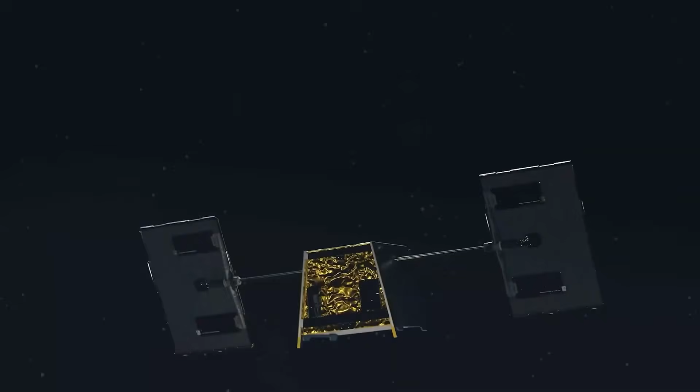Industries are the beating heart of our world. They move us, supply us, shelter us, power us, connect us. They improve our homes, our cities, our environments. And behind them all is ABB.

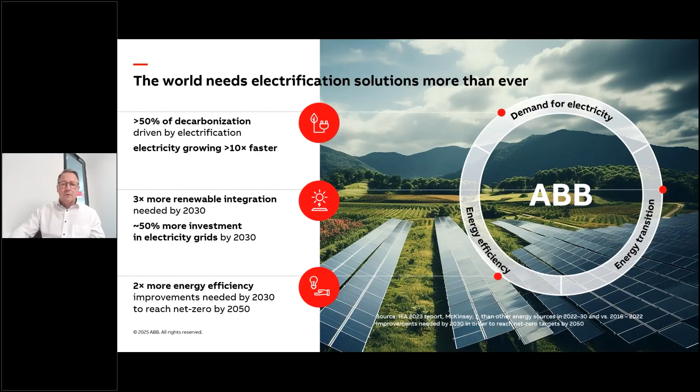We at ABB have the technology, the solutions, and the expertise to accelerate the transition to clean energy, which is necessary for a net zero carbon future. We have the ability to enable the distribution of renewable energy, also critical to the energy sector and energy transition. We keep businesses, homes, and industries running efficiently, reliably, and safely. We support our customers in optimizing and decarbonizing their operations.

Some time back, we did a short survey with our customers. Maybe one of you have even answered this survey. We clearly see that there's a demand for switchgear which is increasing, which comes back to the earlier mentioned point with renewable energy, the growth in data centers, grid modernization, as well as power generation.

Digitalizing switchgear and electrical distribution helps customers and users meet the needs of energy efficiency and continuity of service. Smart switchgear can constantly detect, analyze conditions, and maintenance needs that may occur in the network. We are able to integrate different sensor technology and software to monitor, utilize, and optimize the operating cycles used in the network.

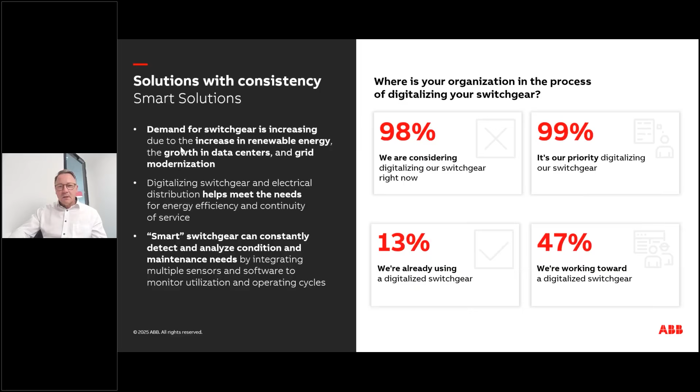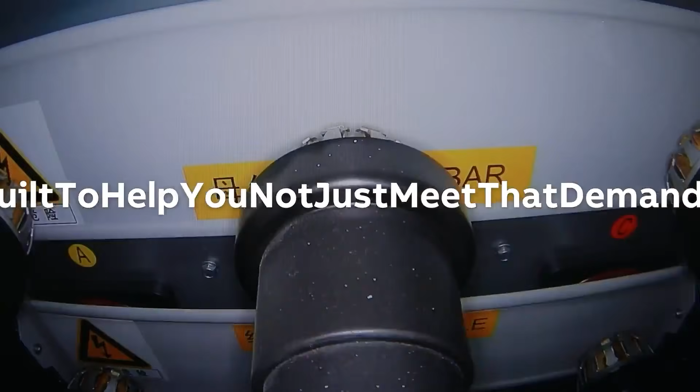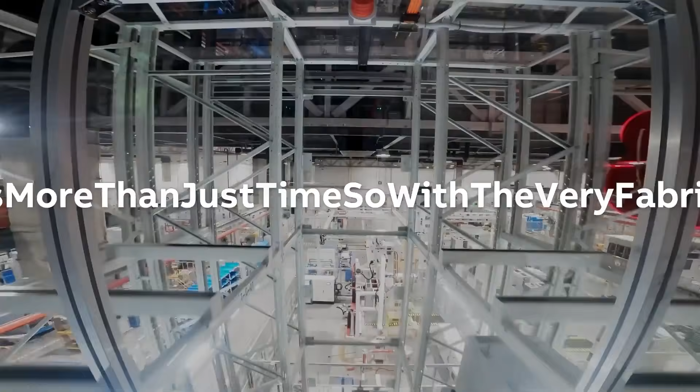Our lives are non-stop, always on, a ceaseless flow of tasks. It means the demands placed on our energy are non-stop too, and will continue to increase beyond our imagination. Greater efficiency, greater sustainability, greater reliability. It's why our infrastructure is built to help you not just meet that demand, but surpass it. We know that when energy gets interrupted, when that flow falters, it breaks more than just confidence and costs more than just time. So with the very fabric of power changing and long-term reliability non-negotiable, Unigear gives you the power to flow non-stop.

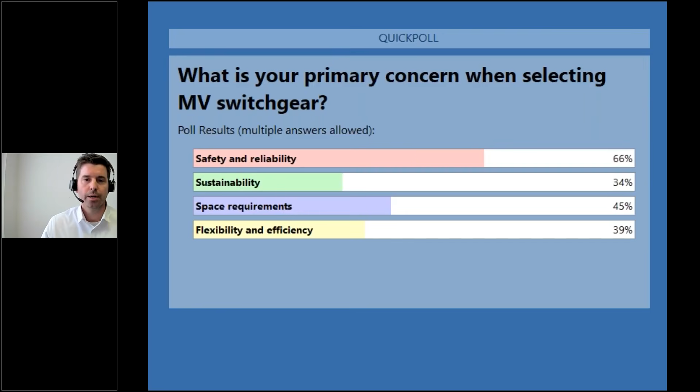Thank you very much for voting, and I would continue with my part. Basically, we will touch on the newest 500mm wide Unigear ZS1 panel.

An electrical network is the silent enabler of the energy transition, as it collects renewable energy from wind, solar, and hydro, and delivers it to all electrical loads. ABB products and solutions are the building blocks of the electrical network. Energy transition doesn't mean only adding renewable energy, but also electrifying the industrial and domestic loads. Today, the primary distribution substations are creating the backbone of this network.

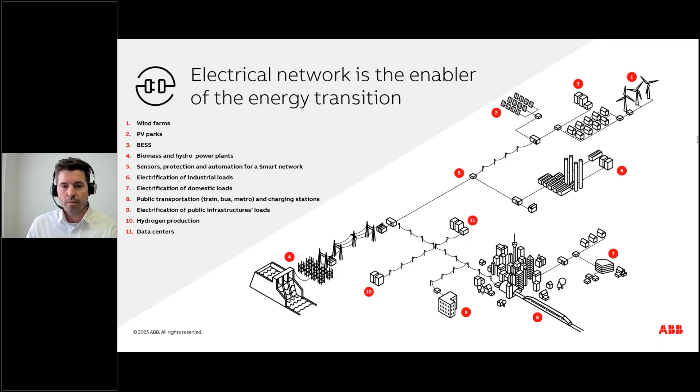Unigear is a well-established product family on the market within medium voltage air insulated switchgears. It includes multiple product lines, starting with Unigear ZS1, Unigear ZS2, Unigear MCC motor control center in single bus bar, double bus bar, or even double level arrangements. Unigear ZS1 is our main product line, and since its release in 1999, we have delivered more than 700,000 panels globally. Our footprint is available in more than 150 countries on 6 continents.

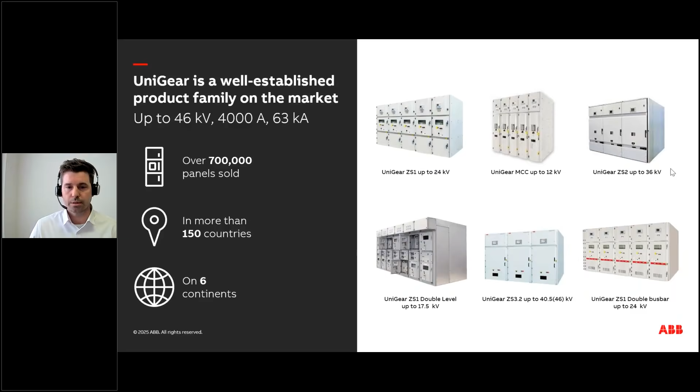As we saw in the poll, safety and reliability and available space were the mainly selected options, where we believe our newest 500mm wide Unigear ZS1 panel is the best choice to tackle these challenges. It has the narrowest footprint on the market for applications asking 12 kilovolt, 1250 amps of nominal current, and 31.5 kA of short circuit current. It is part of the Unigear ZS1 product line, thus compatibility within the Unigear family is achieved, coming with the highest safety standard. 500 mm is available now for orders with delivery starting from mid of 2025.

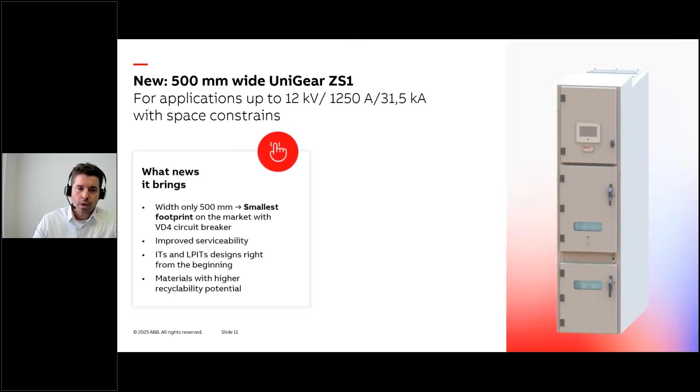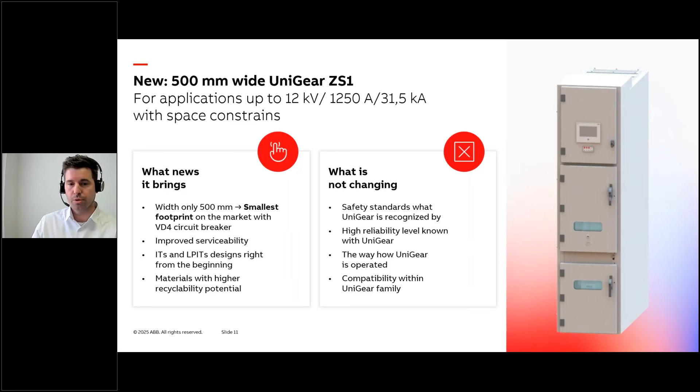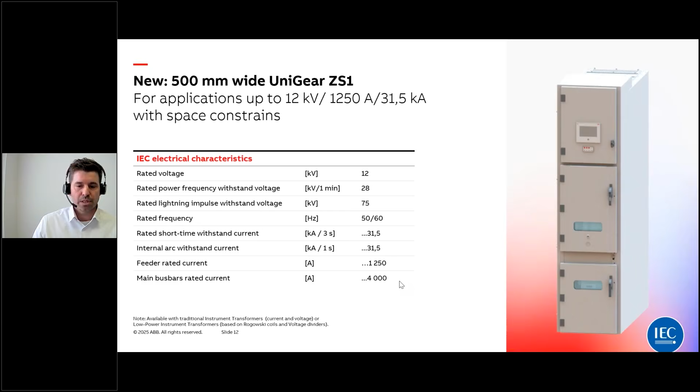So the 500 mm is suitable for applications asking 12 kilovolt of nominal voltage, 1250 amps of rated current, and 31.5 kiloamps of short circuit current. Plus, if we look at the busbar rating, it can go up to a busbar rated current of 4000 amps, so it can be used in such high applications.

When we look into the typical panels available in this 500 mm wide Unigear ZS1 panel, the designs start with simple incoming, outgoing panels, via bus ties and bus risers to be able to form multi-sectional switchgear lineups. Furthermore, it includes metering cubicles, plus direct incoming feeder, all available optionally with voltage busbar measurement.

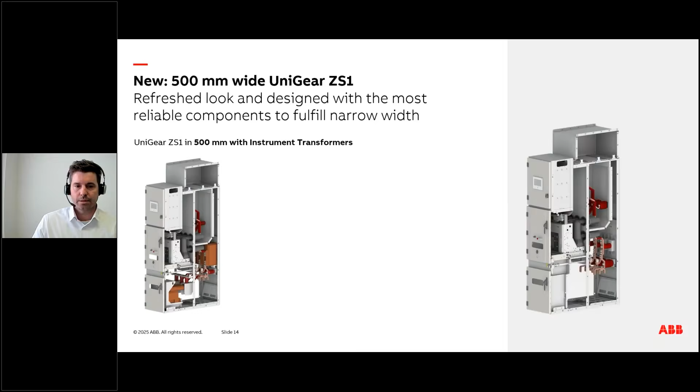Now let's look into the panel itself. The 500 mm comes with a refreshed look and is designed with the most reliable components. From the design perspective, the panel is available in two variants: first with instrument transformers, and second with low power instrument transformers. When we look into the components forming the solution, the key component is the famous circuit breaker, VD4 type, used here with embedded poles.

The second key component is the thermoplastic spouts, which help improve the recyclability level. Third is the earthing switch from our EK family, now the latest evolution of the earthing switches is the EK7 type. Then the key highlight of the panel design is the cable connection. The cable connection height is 450 millimeters, allowing us to connect up to 3 cables per phase.

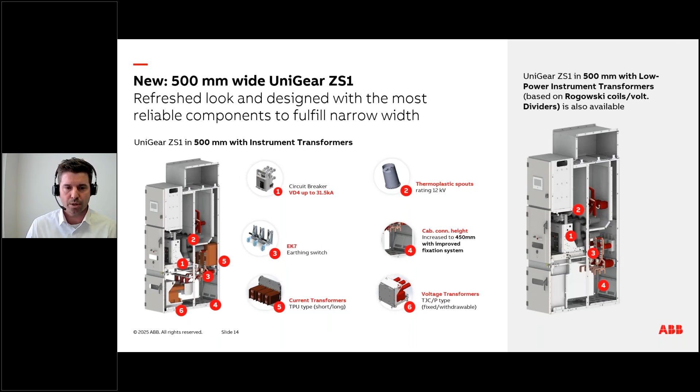When we look into the current transformers, they are typically installed in the cable compartment, and voltage transformers are installed in the front of the cable compartment part of the panel, either in the fixed or removable design. When we look into the low power instrument transformers version of the panel, or the panel accommodating medium voltage sensors, Unigear can accommodate up to 2 sets of current sensors based on the Rogowski coil principle, and up to 2 sets of voltage sensors, one of which can be installed in the busbar compartment for busbar voltage measurement, and the second in the cable compartment for cable voltage measurement.

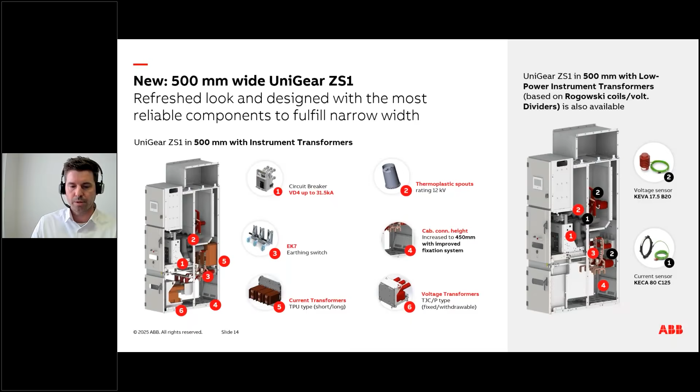When we look at the typical arrangements we can form out of this newest 500mm wide Unigear ZS1 panel, there are three examples shown on screen. Example 1 is a pure lineup where 500mm Unigear ZS1 panels are used in incoming feeders and outgoings. This is a very typical lineup asking 12 kilovolt nominal voltage, 1250 amps nominal current, and 31.5 kA short circuit current. A typical application can be light industry.

In the second example, the 500mm panel can be combined with other switchgear panels from the Unigear family portfolio and used in the outgoing feeders. These lineups can typically be used in heavy industry or even data centers.

The third lineup combines the 500mm from the Unigear ZS1 product line with other more powerful widths of this product line, where higher nominal current or higher busbar current is required. In that case, the 500mm can still fit nicely into the outgoing applications, while the incoming and busbar ratings go above 1250 amps. So all three examples have one thing in common: with the 500mm used in the lineups, we can save up more space.

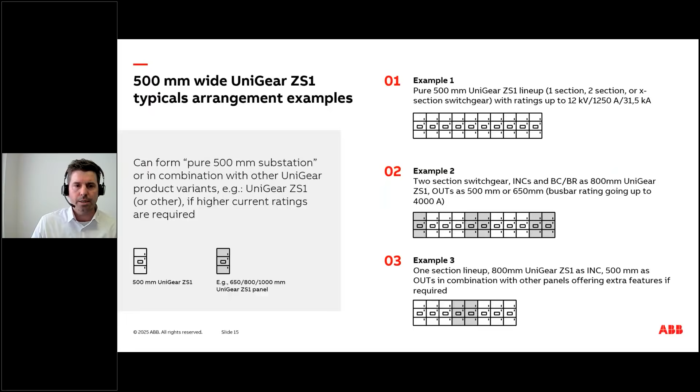In the substations. But if we come back to the 500mm, I feel that this is a product variant which could help give the right answer to the challenges you just selected. In summary, the 500mm delivers space saving in the switchgear room.

That is thanks to the narrow width, and it comes with the famous VD4 circuit breaker. The weight reduction and energy loss reduction come thanks to the usage of low power instrument transformers. That's why in this panel variant we have, since the beginning, released both options: either with instrument transformers or with low power instrument transformers. The reduction of CO2 comes hand in hand thanks to the low power instrument transformer version, using current sensors and voltage sensors instead of traditional instrument transformers, which is much more energy efficient.

Thanks to the narrow width, basically more panels can fit into the switchgear room. We've also put a lot of effort into serviceability, to guarantee serviceability even when the panel is facing the wall in the back. And as mentioned earlier, the panel is now available for ordering, with delivery starting from mid of 2025.

As usual, can I go one slide back? Yes. The first thing you need to do when you want to improve is to start measuring. The best way in terms of sustainability to measure this is to run a complete life cycle assessment.

The life cycle assessment of the product covers its entire life. As you can see on the slide, we can divide it into two basic phases. The first one is from cradle to gate, where we focus more on the product and its production itself.

Starting from the purchasing of raw material, not only to understand and evaluate what material we are using, but also to understand where we are purchasing it, and to map and understand the transportation of the material. Then when we have the material in a factory, we have to handle it.

In our operations, we have to bend, cut metal sheets, copper bars, and then assemble them together. This is one part. The second important part is the energy profile of the factory where we are producing the product.

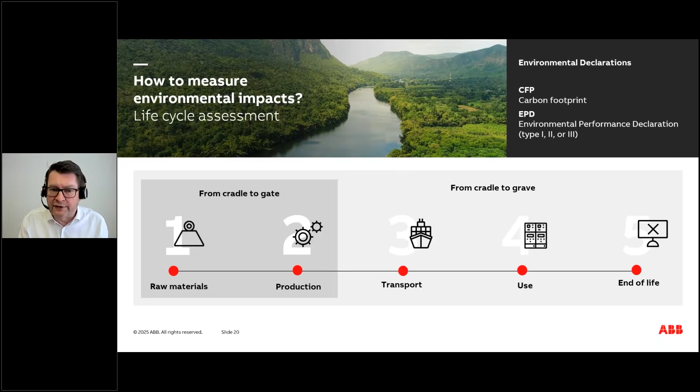And then the last one is also the end of life. I would say when we complete the life cycle assessment of the product, we then have to deliver to you, the customer, some reasonable and readable document called the Environmental Product Declaration.

Generally we can divide environmental declarations into three types. The first one is Type 2, according to ISO 14021 - self-declared environmental claims. In this case, the manufacturer prepares the internal calculation and data, and documents it themselves, which can have certain benefits and also drawbacks.

The second one is Type 3, according to ISO 14025, which is internally verified. The difference from the first one is that in Type 3, internally verified, the manufacturer has trained their own auditors and verifiers who are able to go through and verify it. I would say both these types can have a faster process to reach you, and potentially lower cost.

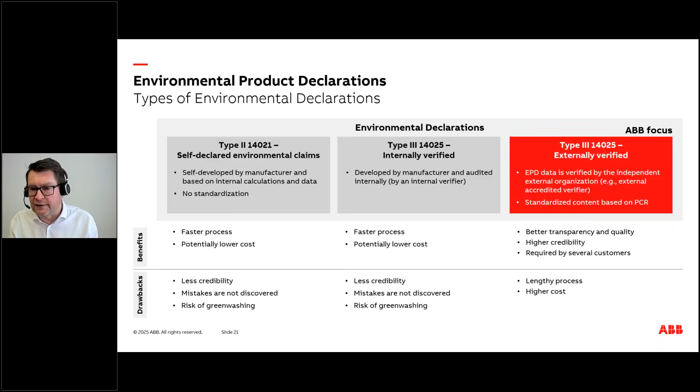What I see as real benefits here is better transparency and quality of the document you can get, and for sure higher credibility. What can be a bit of a drawback is that involving an external verifier in the process takes a bit more time, but I think this is worth waiting for.

Let me briefly explain what you can find in the environmental product declaration.

The basic and first information you get is the detailed split of the material content of the product. As an example, we have the Unigear ZS1 500 millimeter wide panel, rated 12 kilovolt, 1250 amp, and 31.5 kiloamperes, where the main categories are steel, epoxy resin, copper, and other metals like stainless steel. Then also plastics and rubbers, and some remaining materials covered under a category called others.

I think one of the most interesting and important pieces of information you can get from the EPD is the global warming potential. Here is a very transparent and detailed summary of the global warming potential, divided into the same two basic categories I mentioned before: cradle to gate and cradle to grave.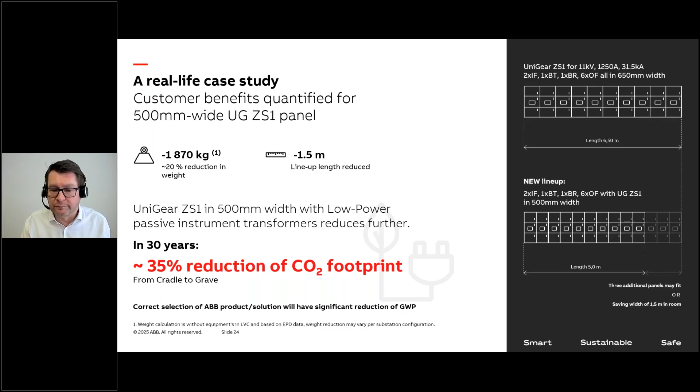Thanks, Roman. So, okay, now we are coming almost to the end, so wrap up. Before we go to the Q&A, we thought it would be good to highlight a few things - some references for the features we have mentioned today.

The first reference is a project related to smart solutions, or the medium voltage switchgear, where sensors, or so-called low power instrument transformers, are used. This installation is done in Finland, and it helps the customer tackle the challenges of today's electrical network, like improving the safety level of the installation, where sensors are an ideal component in increasing the safety level for operators.

Then there's increasing the flexibility - basically the nominal currents and nominal loads of the panels. This is something where low power instrument transformers have much higher flexibility compared to traditional instrument transformers, plus the IEC61850 communication helps with that too.